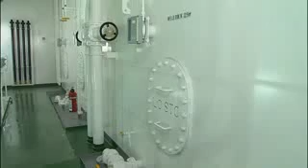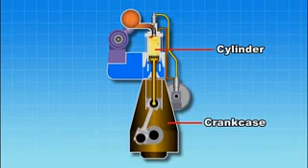This section gives an explanation about the lubricating oil used in marine diesel engines. In a crosshead two-cycle diesel engine, the cylinders and the crankcase are separated, and the cylinder liners are therefore supplied with cylinder oil, while the components in the crankcase are lubricated with system oil.

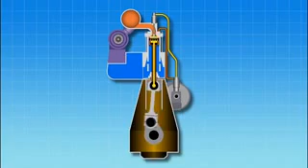Injected fuel is exploded and combusted in the cylinder, and the resulting thermal energy is converted into kinetic energy. The number of revolutions of a large two-cycle engine is approximately 100 rpm, and the explosion and combustion time is long, which is why low-grade fuel can be used. However, this forces the cylinder oil lubricating the cylinder liners to work under severe conditions of extremely high temperature and high pressure.

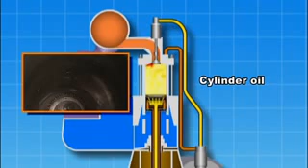As HFO has a high sulfur content of about 3 to 5%, its combustion generates sulfuric acid, which causes corrosive wear of the piston liners. Cylinder oil with a viscosity grade of SAE 50 and a total base number, TBN, of 50 to 70 milligrams KOH per gram is used to neutralize the generated sulfuric acid.

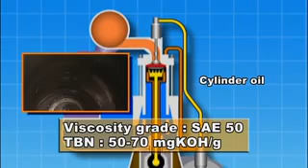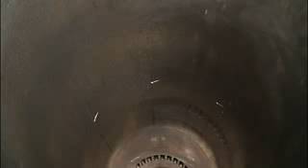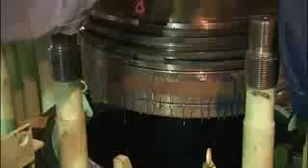Cylinder oil is supplied through oil holes in the cylinder wall in conjunction with the vertical movement of the piston. This oil has to quickly spread over the cylinder wall and maintain sufficient wettability. Some of the cylinder oil supplied to the cylinder liner wall is scraped off by the piston rings, and some of the oil is burned with the combustion gases. However, an adequate amount of oil film must be maintained.

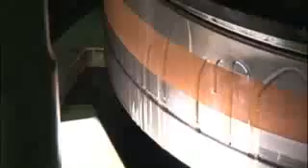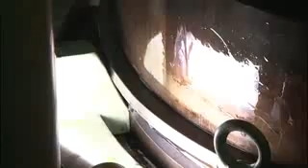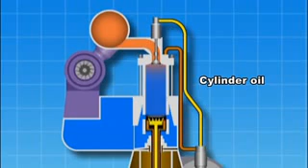The combustion of low-grade fuel oil generates gases such as sulfur dioxide gas, which corrode the cylinder liner, and thus the cylinder oil needs to quickly react with such acidic gases to neutralize them. In addition, the oil must quickly wash away the generated soot and combustion residue from the cylinder liner in order to prevent abnormal wear.

Carbon and combustion residue on the pistons must also be immediately removed to prevent this residue from sticking to the piston rings and in the ring grooves, and to maintain cleanliness.

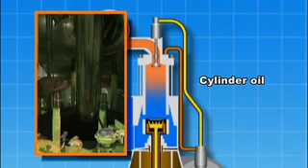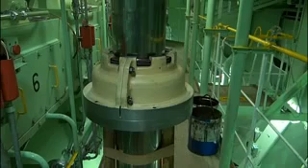Due to the demands of such application, cylinder oil is used only once and then discarded, and waste cylinder oil drainage is discharged from a drain hole at the base of the cylinder. However, a small part of this oil contaminates the system oil by adhering to the piston rods and being scraped off by the stuffing box, and this can result in an increase in viscosity and sludge formation.

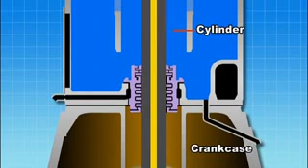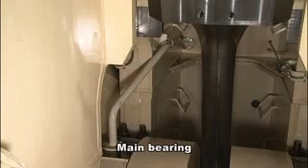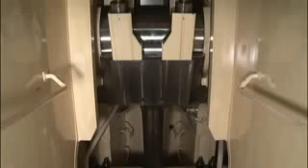System oil is used for lubrication of the main bearings, crankshaft, crosshead pins, crosshead sliding surfaces, gears and camshafts in the crankcase, as well as the hydraulic transmission systems, including the rocker arms driving the exhaust valves, and also for cooling the pistons exposed to intense heat from the backside of pistons. Adequate viscosity, heat resistance and stable base number are therefore necessary for the maintenance of adequate reasonable lubricity.

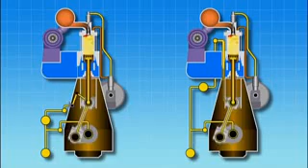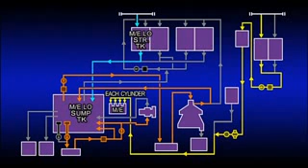Events in the lubricating oil system after bunkering proceed as follows. The necessary amount of lubricating oil is directly supplied to the sump tank from the storage tank. When the main engine is in operation, lubricating oil is circulated via lubricating oil coolers and strainers through lubricating oil pumps.

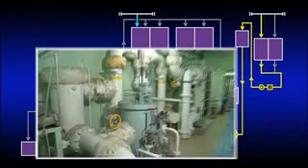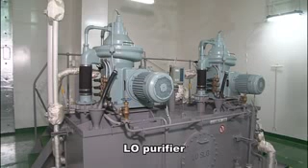As system oil is circulated during use, the lubricating oil purifier is operated continuously to purify the circulating oil. The oil flow of the purifier is usually considerably reduced to conduct circulating purification.

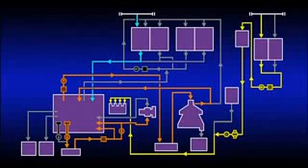For its part, cylinder oil is transferred to the service tank from the storage tank via strainers using a cylinder oil transfer pump. The oil is supplied to the main engine cylinders from the service tank through filters via the main engine cylinder oil lubricator. As cylinder oil is non-reusable, the oil is discharged to the drain after use.